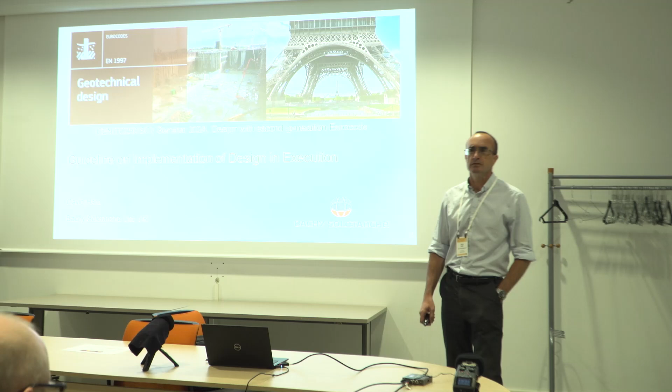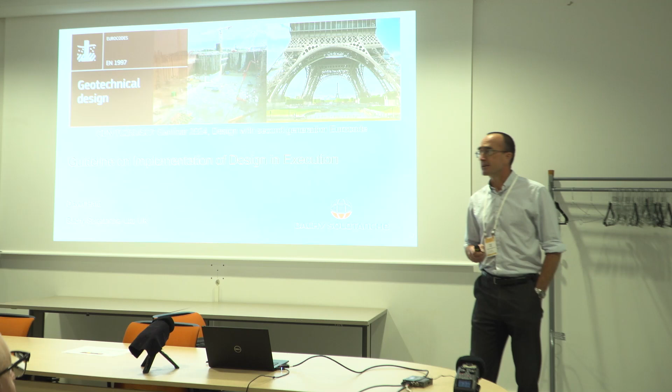Good morning. I'm going to label that as an expectant hush, as it falls quiet. Good news and bad news: the bad news is you've chosen the room with the less comfortable chairs. Good news is you'll definitely be out of here in less than an hour and a half, because I have no intention of taking that long. Okay? So, right.

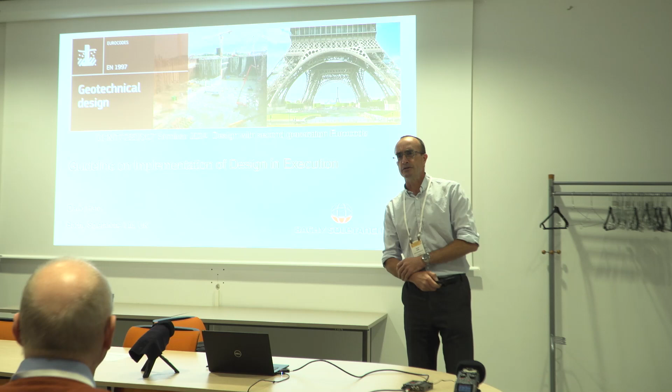Guideline on implementation of design in execution, TGC4. I'm David Hard, I'm Chief Engineer at Bachy-Soletanche in the UK. The observant people will notice that earlier on it was Soletanche Bachy on the screen. I work for Bachy-Soletanche because in the UK we have to be different from the French, so we just swap the name round. Same company.

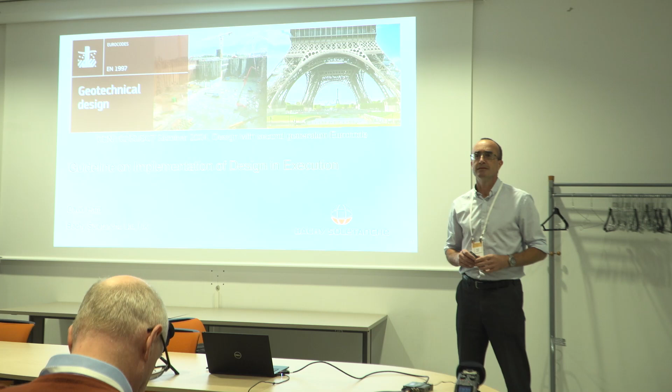I am a designer. I've spent 30 years as a designer, but I work for a contractor. So every day of my career I have been involved with implementing design in execution. So for me, it seems kind of obvious, and I don't understand why people don't do it. However, a lot of people do get it wrong.

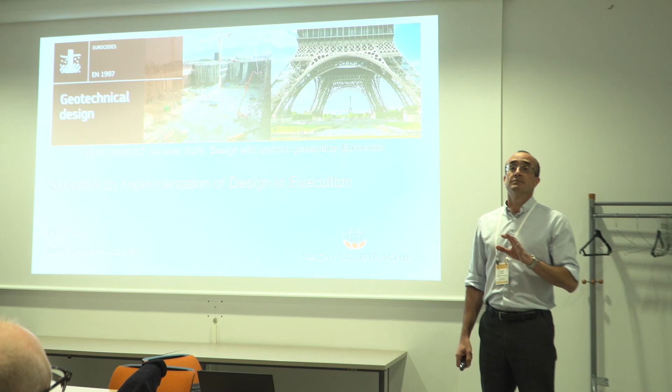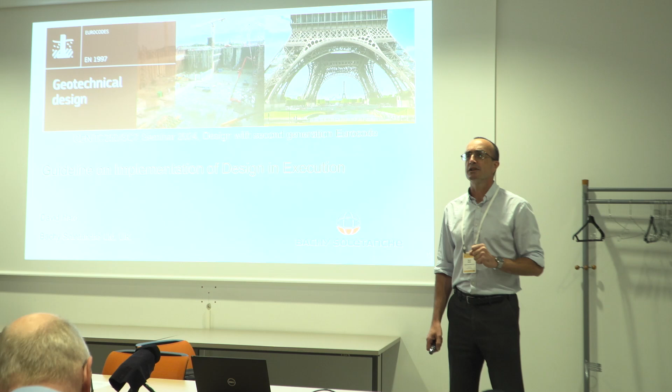But to be clear, this is not my report, okay? The task group had about 22 names from 15 countries. I sent out meeting invitations, I hosted meetings, I nudged and adjusted when people had questions, and I did some editing at the end, but this is very much the work of the task group and not my personal report. Of course, if you think it's really good, it is all my own work, okay?

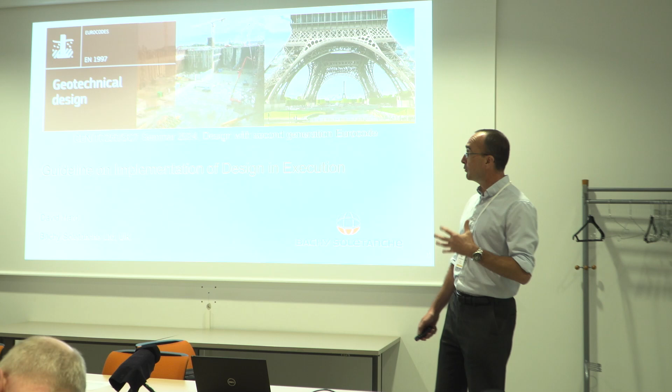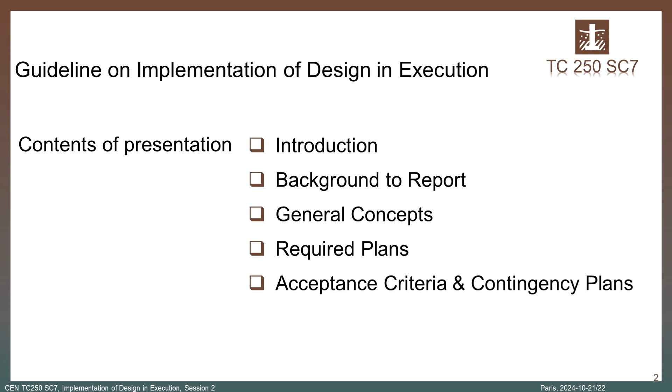So, the background to the report. We were given a scope by SC7. It got tweaked a little bit at the beginning. This all started back in December 2020. So this has taken quite a long time to get to where we are. I had a lot more hair when we started, and not all of it was grey.

So we were asked to look at some general guidance on implementing design. It actually includes, the full title is, in execution and maintenance. But how do you maintain a pile? Okay, so it's generally referred to as implementation of design in execution. We were then also asked to give some guidance on how you should implement the plans, because 1997, second generation, requires you to produce a whole bunch of plans as a designer.

We're then, linking on from that, asked to look into setting out acceptance criteria and what those are, and limit values. And then if you're going to set a limit, that implies that you might go beyond it. So if you go beyond it, what do you do then?

But quite important to this is that point: it needs to cover all types of geotechnical structures we need to look at, and particularly small and medium-sized projects. For me, I don't see this as being a particular issue on the big major projects. If you've got a big mega project, you're building metros, airports, dams, you'll have, I would hope, a mature enough design organisation that they are capable and competent to get it implemented during execution. I don't see those as being the problems. It's the small and medium-sized projects where I think there's more advice required. And then, bottom line, a link to execution standards.

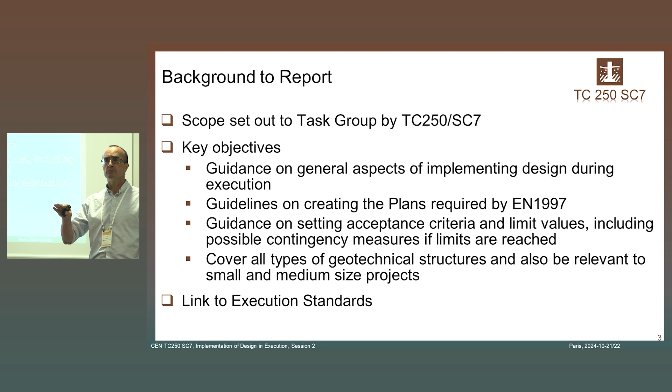Now, okay, I said I'm a contractor. Who here would classify themselves as a designer? Who thinks they're a designer? Okay. Who would say they're a contractor? Okay, it's okay, we still outnumber you, the designers.

Another question: who here in the last week has used Eurocode 7, or Eurocode 2, or 1990? Okay, quite a few of you. Who in the last week has looked at an execution standard? Okay, that's more than I thought. Is anyone going to be brave enough to put their hand up and say that they've never looked at an execution standard? Okay. Yeah, I have my doubts.

Purely because I've worked with colleagues that I know have never opened up an execution standard. I say to them, you do know that's in 1538, and they're like, what's 1538? It's the execution standard for the thing you're building. There is an implicit connection that if you're designing to Eurocode, you are building to the execution standards. And that is an implicit part of your design code you are using.

For full disclosure, I am the UK representative on TC 288, up here with TC 250 which is design. 288 is the technical committee in charge of the execution standards, and I am actually the liaison between 288 and 250, which is probably how I got dragged into this.

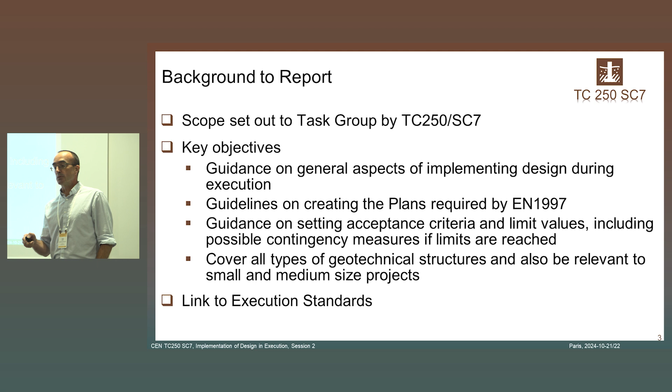However, as with any report, there are some limitations I need to make you aware of when we start off. It's a guideline, not a specification. You can't wave it and say it said it in this document, therefore it is a specification. It's a guideline that we've produced.

It is complementary to the code, so we have to be very clear that we were not creating new content for the code. There were a few discussions around that because some people did want to try and sneak things in, bearing in mind that this was going on whilst the codes were still being written.

It also has to be relevant to all countries, which again is quite a challenge because every country has its own national guidelines on how things get built and designed. So we had to somehow try and pick up that in the document. We've tried to address and reference relevant documents. Some countries don't have them, but generally speaking, the UK, France and Germany do have their own documents, so quite often you'll find those documents being referenced in this guideline.

But equally, it's not exhaustive, okay? Engineering judgment is something that, and I realise I'm turning into an old man, I'm starting to sound like my father, but engineering judgment is something I see less and less of in younger engineers. So again, this is a guideline, we've got plenty of examples in it, but it is on the basis that you will be looking at those in the context of your project. Don't try and make your project fit our guideline, okay? Because that's probably not going to end well for anybody.

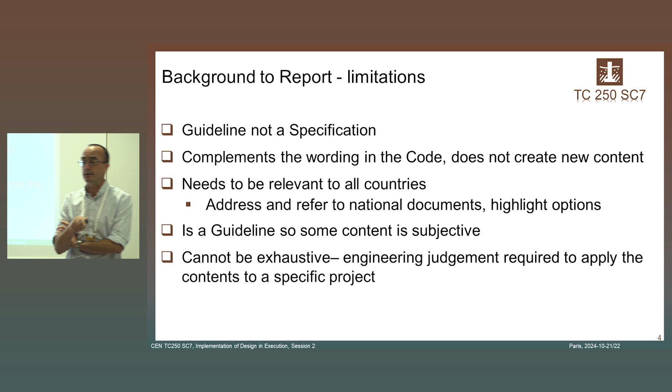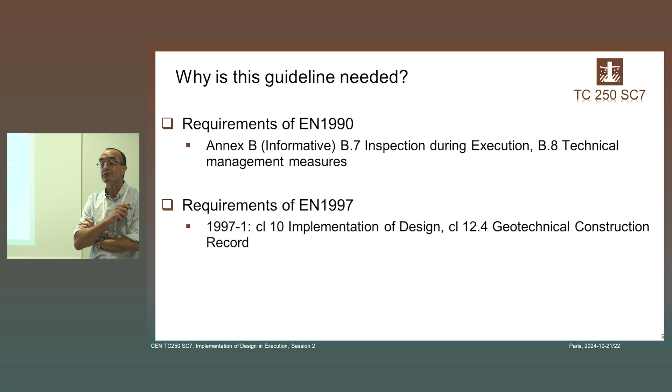So why is this needed? Well, within 1990 and 1997, there are requirements on the designer - this is all aimed at the designer, not the person building it - that you will have quality management in place, and that's in 1990. And in 1997, there's a specific clause around implementation of design. So you are obliged to do this. And so that's why this guideline has been created, because there was a feeling that people weren't quite sure what to do, and in fact the code is quite vague. It just says do it. So why is this important?

Well, the design, yes, is covered by 1997, so you've got a nice design code, that's great. Good luck interpreting it. You need a really big desk by the time you've got all the documents laid out in front of you.

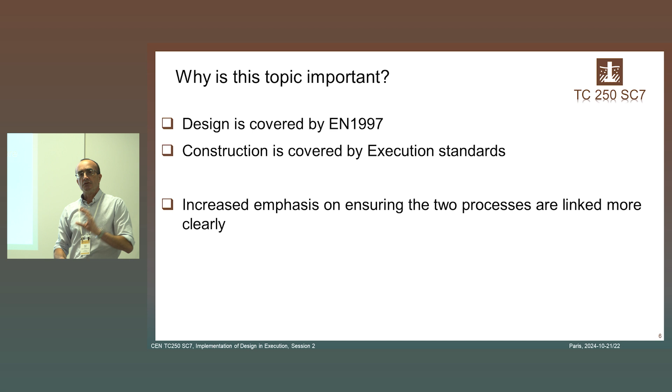The construction is covered by the execution standards, and pretty much all the different geotechnical types of structures have their own execution standard. There is still one being written for artificial ground freezing, but that's a bit niche. But everything else - bored piles, retaining walls, micro piles, displacement piles, anchors - everything has its own execution standard. So the construction's covered by that, but other than vague bits in each document saying, oh yeah, you've got to make sure that your design takes into account the execution, and in the execution standards there's a considerations in design clause that floats through all of them, there's never really been a particularly strong link.

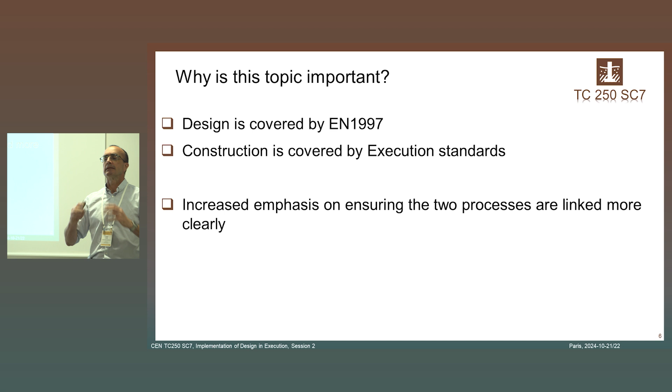So in this second generation of 1997, there was an active thought, let's try and make sure that link is created and reinforced so that it does happen, because I'm biased - I'm a contractor - but if you design something and you don't build it, all you've done is a very interesting theoretical exercise. The only reason for designing the thing is so it's built. So it has to be designed in a way that it can be built. You need to make sure that the entire process is linked through.

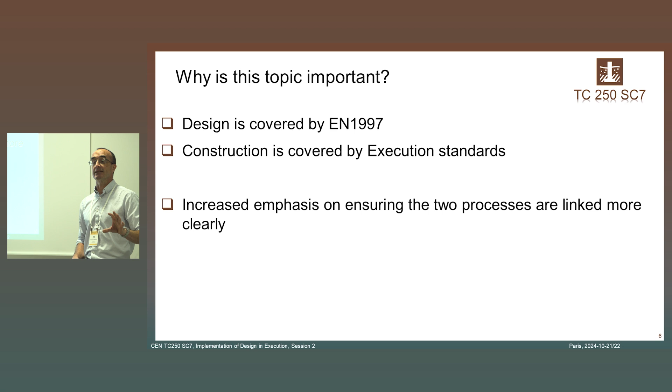The guideline - this is just a run through what's in there. We've got a general section at the front covering all different aspects of the general background you should be thinking about.

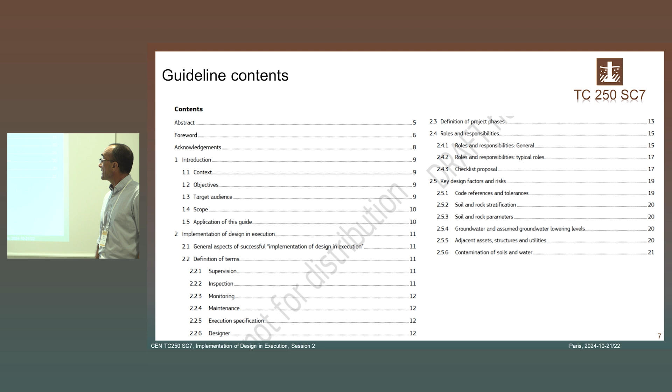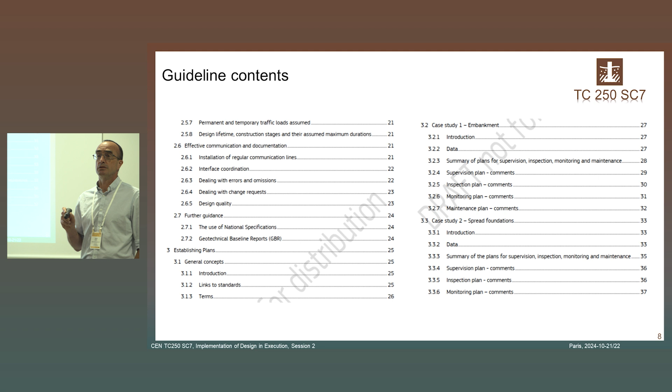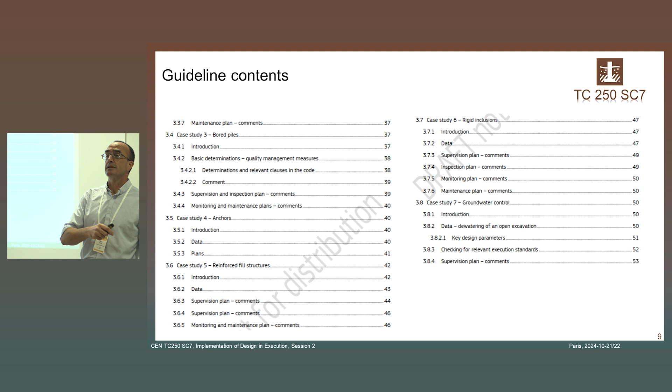And then we have sections on establishing plans, with lots of case studies and examples. I haven't run through any of those here because they're all in the document. The version sent out in advance of this meeting is the one going to publishing, so other than a prettier front page, what you see is what you're going to get. Feel free to go through and look at the examples, since we tried to pick up most of the common types of geotechnical structures you'll encounter when looking at plans. Then there's guidance on what you need to be thinking about as part of those plans, a section on acceptance criteria, and an annex with checklists for the plans.

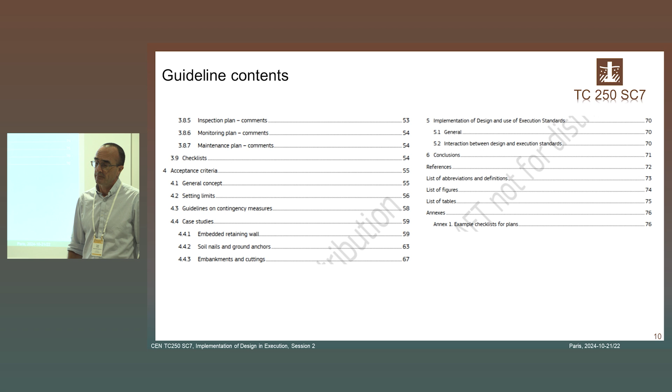So, general principles. If you take nothing else away from this presentation, please take away that top point: appropriate and effective communication. And it's a two-way process. Yes, you as the designer have issued your information to the site, but some documents are classified as being live. The GDR is a live document, so you should expect information to come back to you from the site team, even if it's just them giving you the daily record.

So it's a two-way discussion. Who is doing what, and where do responsibilities lie? It's rare for a project to start off with the same team it ends up with, and I'm not just talking about individuals, I'm talking about organisations. As you move through the project, different companies and organisations get involved, which means you've got interfaces. So pretty much every problem that happens on a site comes down to people not knowing what they're meant to be doing, or having different opinions of what they should be doing.

Who's responsible? You need to start thinking about this at the beginning of your design process. Don't wait until the contractor's been awarded and you've sent off a bunch of drawings to site, then think 'oh yeah, we need to think about this, don't we?' By then it's too late. So you need to be thinking about this as part of your design process. It might seem tedious, a bit like admin - isn't this just document control? But this is the process of how you get your design built correctly, the way you want it.

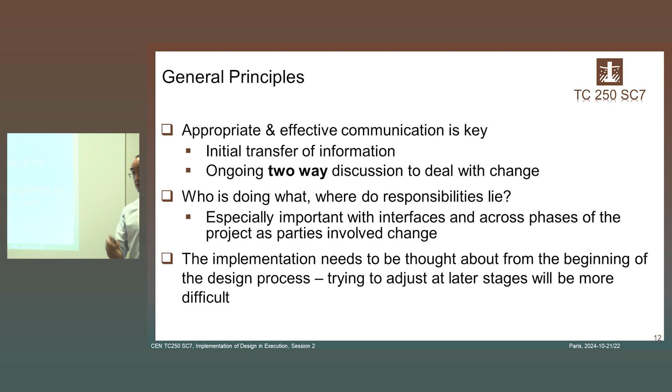So within the report, we identified some key factors useful for successful implementation. The key thing there again is common understanding, and there's a list of items. Because otherwise you can have two organisations who both think they're talking about the same thing, with no malice involved, but they just don't have the same understanding of what they're discussing. So making sure there's that common understanding is key to getting your design successfully implemented out onto site.

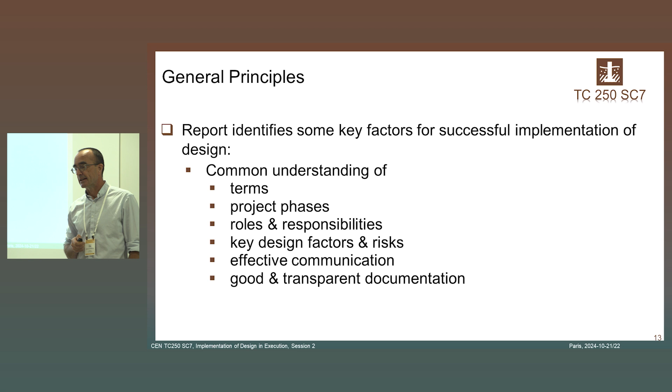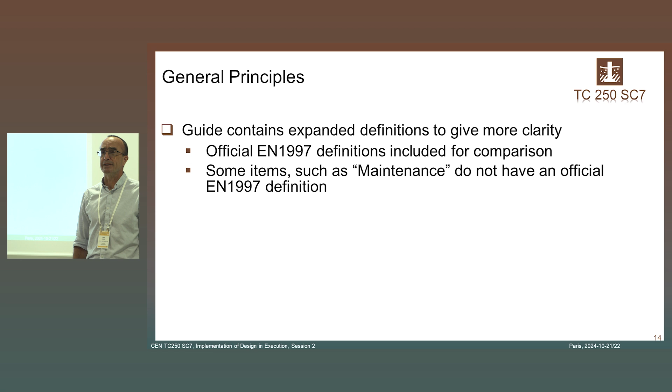So we've expanded some of the definitions. We haven't changed the definitions, and we've made sure the original definition is still in there. Although, interestingly, while you're required to have a maintenance plan, there's no actual definition of maintenance in the code, so you can literally make that whatever you want. We have given a definition for it, but here, for example, is inspection.

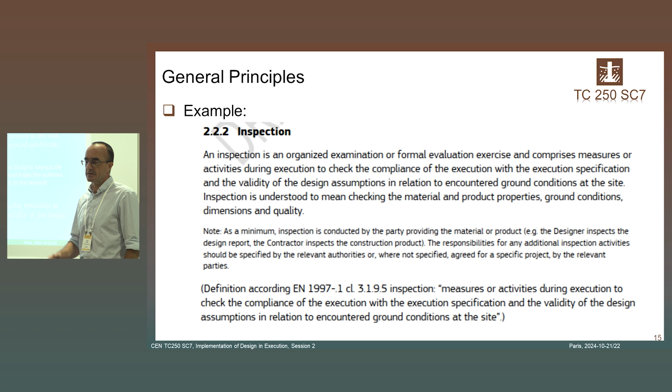But at the bottom - and it's the same for all the different terms - if there's a code definition, it's there. So you can see the code definition, two or three lines. We've put a little bit more into it, with notes, just to try and make it a bit clearer what inspection is. We've done the same for quite a few terms, just to try and improve this common understanding, and some of those took quite a bit of picking through to get an agreed wording.

But then also project phases. We've picked out a nice table - I didn't put it here because it doesn't work quite so well on the screen, but it works well in the document. In the UK we have RIBA phases, there's the ACE, in Germany we have the HOAI phases - standardised phases for a project. So if you're talking about RIBA phase 2 or phase 3, it's a recognised stage of maturity in the project.

And then you can also link the documents - which documents should you have ready at that point in time. If you're at stage 3, where is your GDR? Where's your GIR? Do you have those documents ready, and who's producing them? We found globally probably a dozen different methods of coming up with these phases.

So we put in a table just to show how you can use them. This isn't to say you have to use them, but if someone's talking about RIBA and someone else is talking about HOAI, you've got a method of matching them up. It's a way of saying we're going to be at stage 3, and that's when I hand over to you, or at stage 5, and that's when you give me that document - just a method of breaking up the phases into an easy to understand process for everybody.

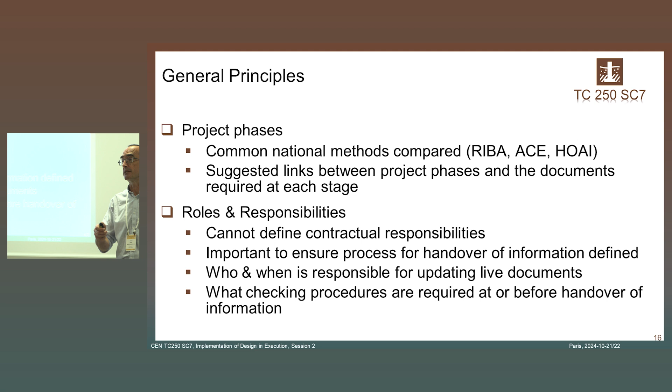Design risks - this is one of the key areas. As a designer you've designed your structure, and you know it needs to found within a certain strata, or it needs to form a cut-off, or extend to a certain toe level. You will have a set of criteria that you need, and you'll also have a vast amount of information, calculations, loadings, and everything you've gone through to get to that solution. The contractor doesn't need all of that.

What they need is the relevant information to be able to build that structure. So if you say I need those piles to found 1 metre into that sand layer, they need to know that. Do they need to know everything that's above that sand layer? Not necessarily. Do they need to know why you've decided to go that depth?

They might, but that comes down to this two-way communication, because if they start finding that sand layer at a higher level or a much deeper level, or they don't find it at all, do they just keep ploughing on until they discover it? What is the process? They need to be able to judge whether they're still operating within your design assumptions, or whether they need to come back to you and say, not quite sure what's going on here, what do you want to do?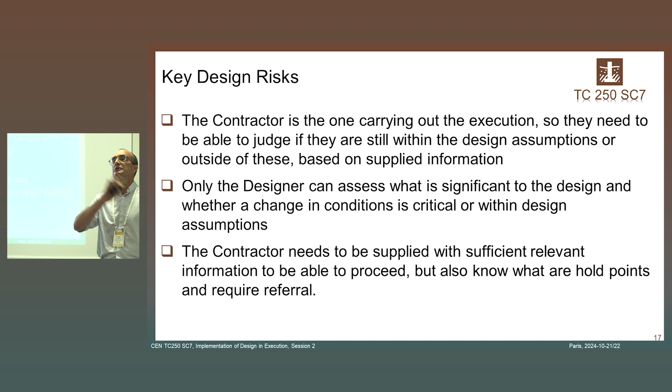So, sufficient relevant information to be able to proceed, but also know what the hold points are. You need to know what's critical in your design in relation to execution - which is not the thousands of gigabytes of data that you've got sat on your computer.

That information also needs to be supplied in a format which the contractor can actually use on site. Geotechnics happens below ground. When we're installing that anchor, dewatering well, sheet pile, whatever it is, we will have very limited information coming back about what ground it's gone into and how that relates to your design assumptions. So if you're saying strata X or certain levels, can that contractor identify that on site?

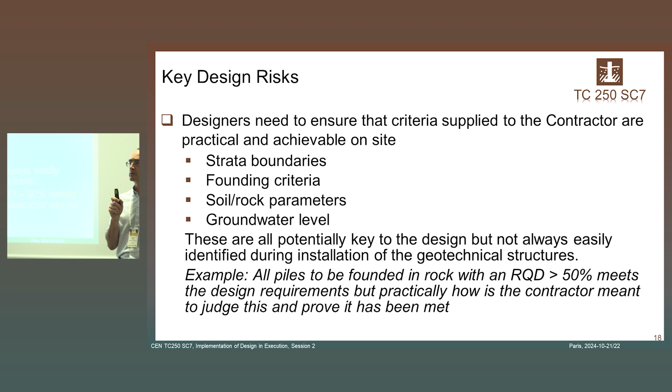That example at the bottom is something I actually had in a project we were tendering, where we were told that the piles had to found, 2 or 3 metres, into a material with an RQD greater than 50%. How the hell is the rig operator going to know that?

Now, you could go, okay, we will put a borehole down every single pile location and take a continuous rock core out the bottom until we have identified what that is. Now, that is a method of solving that problem. It's going to cost the client a lot of money, which is fine if that's all agreed up front.

So that's all possible. But just sticking that note on the drawing, I looked at that and went, how do we price that? Bearing in mind that the boreholes weren't actually deep enough and didn't go far enough, and some of them didn't even identify rock of that grade. So that I would classify as not a very helpful note. But that was critical, obviously, to their design.

And this was at tender stage. We dodged a bullet, we didn't win that job. The feedback from the contractor on site that was doing the job is, yeah, they're losing a lot of money and it's not going particularly well.

But that's an example of something which is key to your design, but has not been totally thought through in terms of how it's implemented. There are methods to implement it, but they're going to be time heavy and expensive.

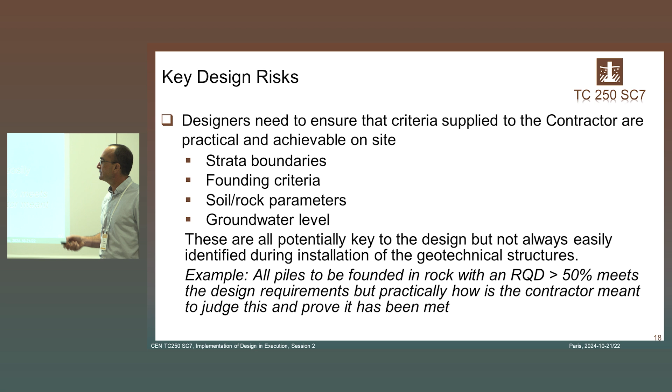So, point laboured. Communication between parties - saying communication is one of the key parts of this process. Any project is going to have its own document control, admin procedures to go on. That's fine. So what we've done in the guideline is say, okay, here's some good practice concepts that you can maybe try and take into your project.

Now, these are points that would be worthwhile having. You may already have them. As I say, the big projects, they're probably already baked into the document control procedure. So things like design handover meetings, making sure you've got contact lists, who's responsible for what. Design coordinator - that will depend on the size of your project.

But if you've got lots of different things going on, lots of different contractors, maybe you've got more than one designer. So do you need one person to just coordinate all of that and make sure that things aren't falling through the gaps?

And then methods to deal with changes, errors and omissions, because we don't live in a perfect world. You get on site, things aren't what you expected. Things go wrong. Put my hand up, we're contractors, we don't always get it right first time, okay? It happens. So what is your process for dealing with that in the design?

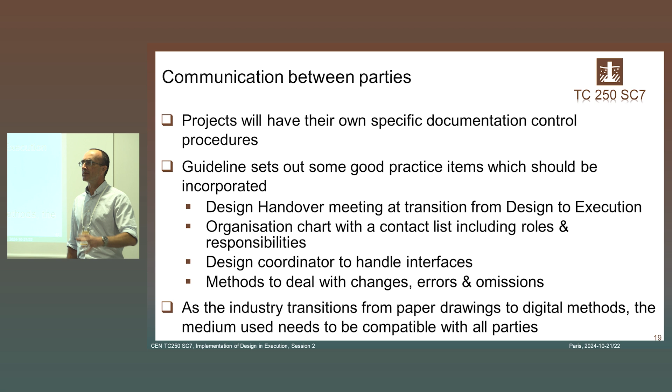Equally, I know some people don't like handing over raw data because in construction, and certainly in the UK, it's a trust issue. That's why you get handed a PDF, because if you get given the PDF, then you can't have meddled with it. Well, yeah, you can meddle with PDFs now. But if someone gives you a CAD file or a Revit model, they're like, yeah, but you might have changed something in there. It's a trust issue. Maybe it's just the UK. We just, contractors don't get trusted.

But think about that. So okay, then the plans, there's a lot of plans, but this is a requirement, you have to do this: create those four plans - supervision, inspection, monitoring and maintenance. A maintenance plan for a geotechnical structure, an interesting one. Depends what it is. If it's a spread footing, it's going to be a fairly simple maintenance plan. If it's an anchored retaining wall, it's going to be a fairly complicated plan. However, all the code says is that you have to do this.

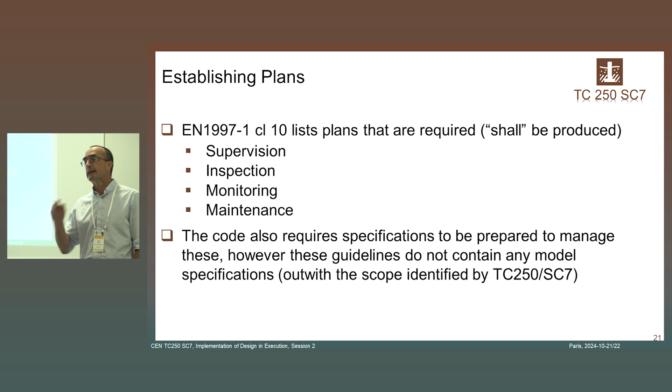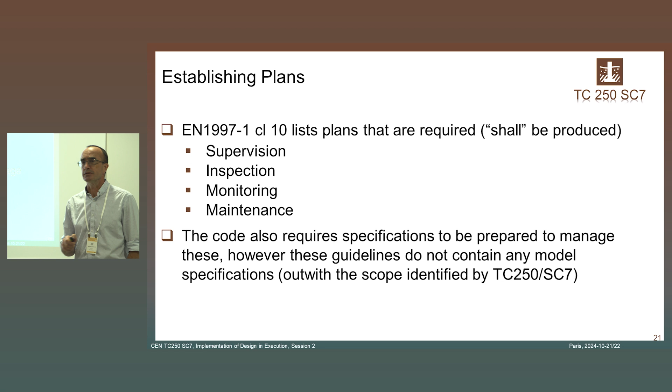And that's the beginning and the end of the help you get given. Hence the guideline. It then also says you have to have specifications to implement those plans, but this guideline is not covering specifications. We've deliberately stayed away from anything that is a specification. All we're saying is, here's some plans, this is the sort of information you should be thinking about, how you could implement it, but we've not got model specifications in this document, because it's just asking for trouble across national boundaries and it's contractual, so we've not gone there.

You have to do them. They have to become part of the GDR. So again, you need to think a little bit about how they're going to be issued. Now, it could be a one-pager. There's nothing to say that one of these plans has to be a massive work of literature with multiple pages. It could be really simple, and supervision and inspection can quite often on a simple project be combined into one thing. So you need to look at your project and say, okay, what do we need to do?

And you may find for some parts of the process the execution standard has already got everything you need in there already, particularly if you're looking at some things like ground anchors - there's some very detailed information in there around the plans. So you'll probably find that a lot of what you need is already in the execution standards. Plus, you don't want to be writing something in your inspection plan that conflicts with the execution standard, because then you've got a hierarchical problem in that the execution standard is the official code document, but you've now written something yourself contractually for your project which conflicts with it. So you're going to have to try and sort that one out. So have a look at the execution standards whilst you're writing these plans - if nothing else, it may save you some work.

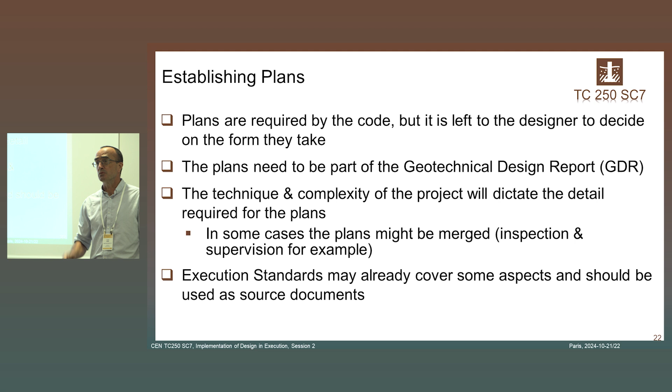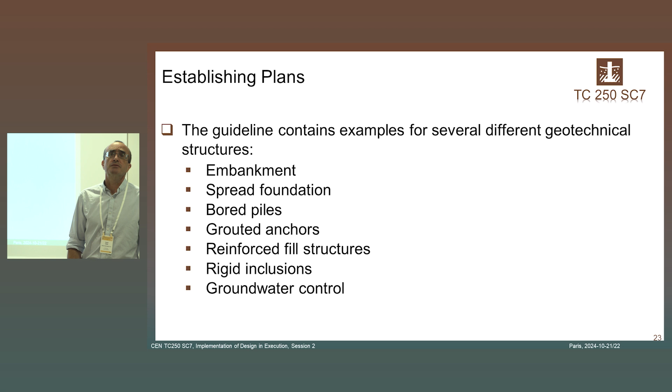So we've looked at, doesn't cover everything, but we did examples for all of those different types of structures. So we felt within that we've probably covered the majority of the issues you're going to come up with. Some are more complicated than others. A spread footing example is obviously not a particularly large, complicated structure.

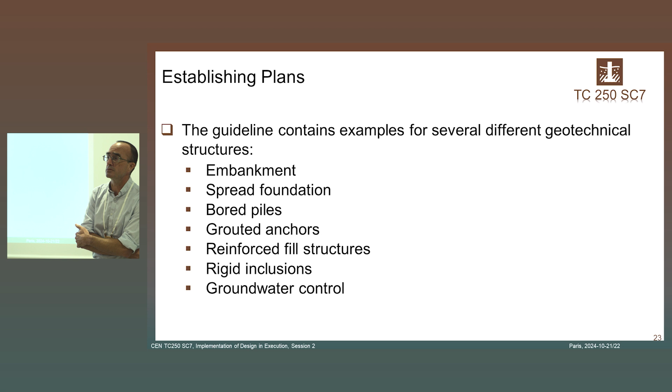Anchors and some of the embankment stuff, reinforced fills, it's a bit more complicated, particularly ground anchors, because if you've got an anchor, you've normally got an associated structure with it - you're not normally going to build an anchor without a retaining wall. So there's a lot more to one of those examples than, say, the others. And then we put groundwater control in there, because that's sort of the forgotten cousin sometimes. Everyone thinks about the physical drill a hole, fill it with concrete type stuff, but groundwater control has got its own clause now. So we made sure we had an example in there to try and cover that as well.

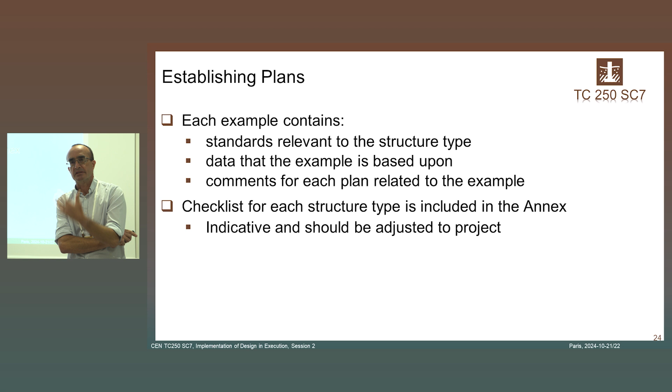Within each of those examples, we've tried to pick up all the standards that would be useful to look at for that structure. So we've picked off the execution standards and any other associated standards you might need to look at to help you come up with that plan. And then there's some data, some geotechnical data about soil parameters, the actual geometry, there's a sketch, and then we put in some comments to cover key aspects you need to think about.

We also created checklists for the plans. Now, this was a big discussion because checklists are a bit double-edged. They're very useful as a starting point for a project, but the risk is people don't bother thinking about their projects and it becomes literally box ticking. In the end, we decided to put them in because they are useful, especially for small and medium-sized projects, where they should be helpful for designers. There's pages of them, because there's quite a few points to pick up on any particular structure, but we decided to put them in the annex as a sort of guidance checklist. As we said, everything needs engineering judgment and needs to be tweaked to fit your project. But in the end, we concluded that checklists would be a useful item to have in there.

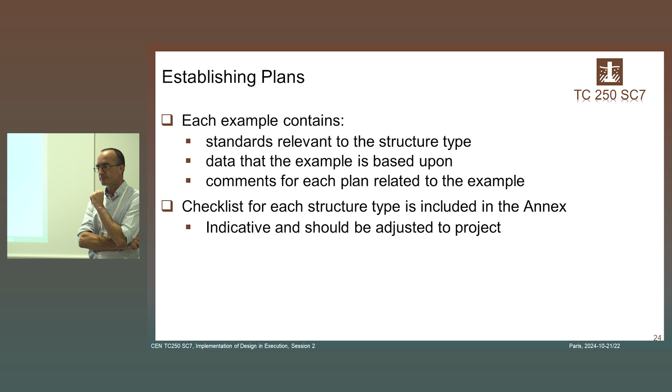The other item we were asked to look at is acceptance criteria. So what are acceptance criteria? Well, this is how you're trying to judge whether your built structure matches your design.

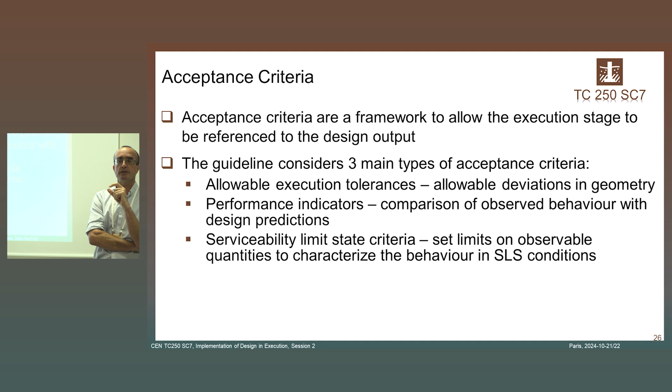We decided there are three essential types of acceptance criteria. There's execution tolerances - how out of verticality it can be, how far out of position in plan, just standard execution tolerances. Performance indicators, which are: is it behaving how we thought it would behave? You've predicted wall movements, pile settlements, or embankment settlements - you've made some predictions. Or the third category is serviceability, which is how it impacts either itself or adjacent structures. So what is the most critical thing? Your wall is designed for, let's say, a wall movement of 25 millimetres, but are there structures around that can't tolerate that, or are there items around your actual structure itself that are critical, so you've got a very tight tolerance in terms of its SLS behaviour?

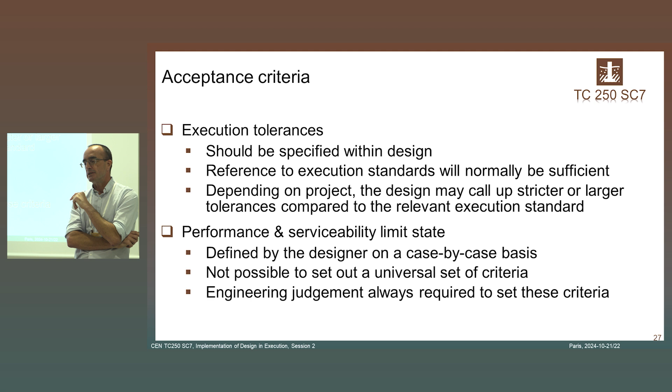So execution tolerances would normally fall within your standard specification. There's stuff in the execution standards. You might decide you want to tighten them up, or you might decide you can live with some slightly looser tolerances. So those should be fairly simple to identify for a project. Performance and serviceability is linked directly to your design itself and the surrounding zone of influence, because there's not a universal set of criteria. You can't say the pile should not settle more than, or the wall should not deflect more than a fixed amount - it's not possible. So you're always going to need engineering judgment to set these criteria and also to adapt as the project goes along.

So the zone of influence becomes quite critical, because you should be looking not just at your structure itself, but at everything else in that zone of influence when setting these acceptance criteria. If you're building in the middle of a green field, happy days, because there's nothing to worry about. If you're building a 6-level basement in the middle of a city, everything you do as that starts going on affects things around it. So you need to be thinking about your acceptance criteria reflecting what all of those other structures can tolerate. And this is where you've got different aspects to serviceability criteria. If something moves too much and it cracks, is that just a case of it doesn't look very nice? People don't like cracks on walls, but it might just be the plaster's cracked. Is that actually a problem?

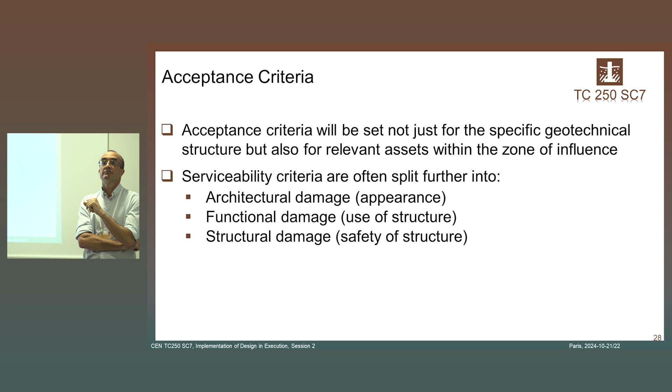You've got functional damage, whereby this has now moved, and this would be thinking about roads, railways. They normally have quite tight tolerances on gradients, so you might have gone outside the allowable criteria for it to be deemed to function. It's not unsafe, you just can't use it. And then there's, actually now this has moved too much and there's a safety issue. So what are those criteria you're thinking about when setting those limits?

There is information on standard sort of deflections and span criteria that structures will accept if you had nothing else from the designer to work on. So you can fall back to that.

Equally, a lot of national, especially railways and highways organisations, have their own documents around their type of structures, where they will say this is the deflection we can live with, this is the maximum change in gradient, and so those will be setting criteria. So if you're working next to one of their structures, you will have to comply with their criteria. You just need to be thinking about what in your country is applicable for you.

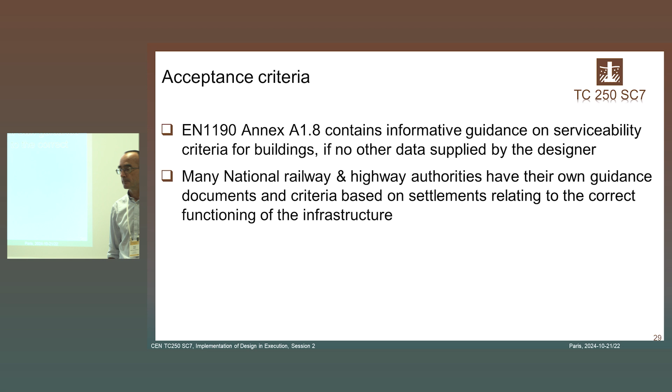So how do you set limits? What sort of things should you be looking at? It's got to be something you can measure, and measure meaningfully. So normally you're looking at displacements and deformations, you might be looking at strains, you might be looking at vibrations.

We did a job in the UK where we were next to the British Museum, which is full of things that the British Empire took from around the world back in the day. Some of those items are literally priceless, they couldn't even get insurance to move them. So we had very tight vibration criteria because of a 3,000-year-old Chinese vase sat on a shelf. They couldn't move it because that was deemed more risky than us piling next to the site. So we had vibration limits set that were undetectable to a human.

We found out in the end that putting in the retaining wall was not the problem. We put in the secant wall and we didn't trigger anything. Excavators tracking across the site set every alarm bell off. It was to do with how the vibrations went through the ground and the footings that the British Museum was sat on. But that's an example of where vibration was driving everything that was done on site.

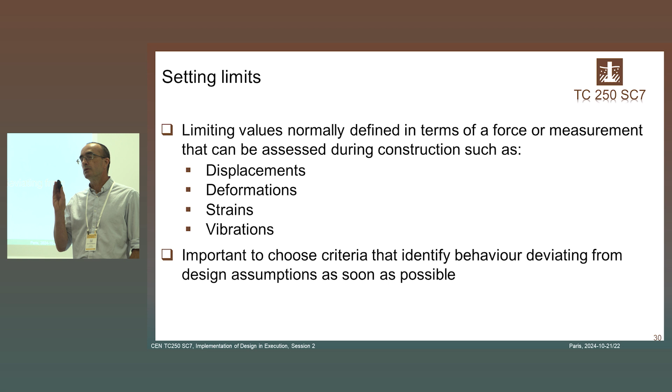So you have to choose criteria which identify behaviour deviating from your design, because you can pick all sorts of things to measure on a site. But what you need to bear in mind is these need to be the criteria that allow you, or the contractor, depending on who's responsible, to pick up that, hang on a minute, we're now moving outside the design assumptions.

There's an old saying that came out of New Zealand many years ago: does it make the boat go faster, for the America's Cup? It's the concept of, if I'm asked to do something, what is the benefit to the project? If it's not benefiting the project other than you're just gathering some interesting data, why are we doing this?

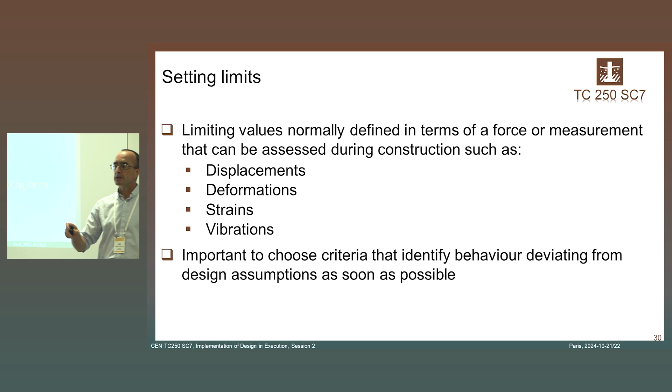So make sure that the criteria being picked to measure against are the right ones as soon as possible. Because if you've picked something that has to have quite a bit of movement before it starts registering, is that the right criteria to be looking at?

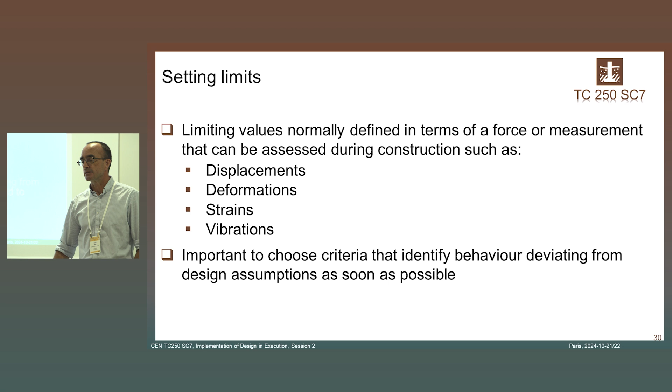So again, there's lots of different ways you can set them. We talk in the guideline about the traffic light system, because it's quite a common concept, most people understand traffic lights. Apologies if anyone's colourblind, because red, green, amber is probably less helpful to you. But it's a very common concept around setting limits.

So you've got green, happy days, the project is doing what we thought it would do. You've got an amber limit, which is, okay, we're now getting towards the limit of what we were expecting it to do. And then you would normally have a red limit, which is the hard barrier we do not want to go through. Because at that point, things have to stop, because we're now into the territory where something is going to be unsafe, something's going to get broken.

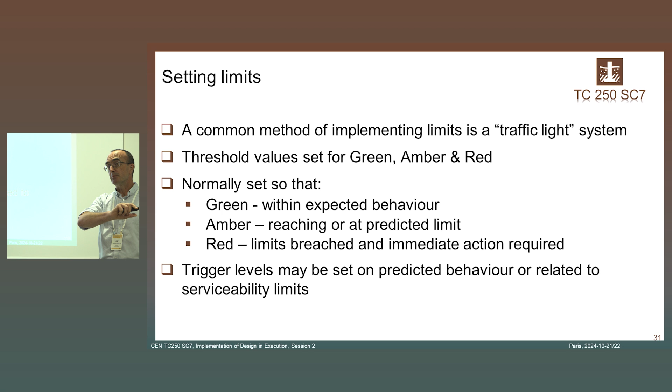Now those limits, they could be based on your predicted behaviour, or they might be set on the serviceability limit. So you might say we've got a limit based on how much the wall deflects, that's your prediction, or you might say we can't accept more than a certain amount because otherwise the adjacent structure will be damaged.

Where you set these limits is, again, this is down to engineering judgment, but some typical ideas might be that, if you set limits too low, you breach them too early in the project, and that's not helpful, because all you've done is gone sailing through the limit, everyone agrees it's okay, and you carry on. So what was the point of setting that limit in the first place?

If you set them too close to the edge, you've removed your room to manoeuvre to get out of the problem if it starts occurring on the red limit. So an amber, you want to be setting at the point where, okay, it's starting to behave a bit beyond what we were expecting. So do we need to start thinking a little bit about what this is doing?

The red limit needs to be, if you set a red limit too low or too small a number, it becomes meaningless. Because I've had projects where they've been set and you go straight through the red limit and everyone goes, yeah, but nothing's happened. Everything's fine. So hang on a minute, why was that set at that limit?

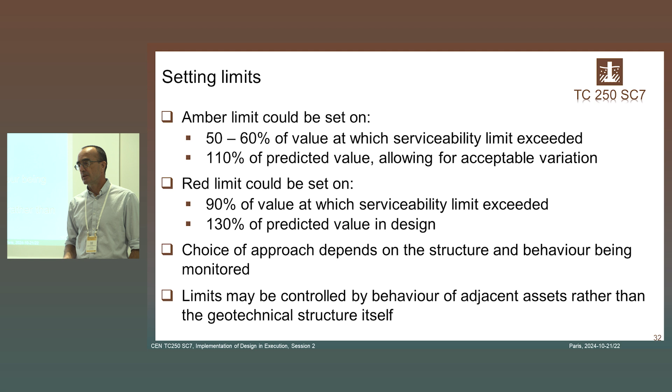It depends on what you're monitoring and why. And those limits are quite often determined by the surrounding assets, not your structure. So you are reliant on third-party information to get these set correctly.

You will also potentially have to adjust these as you go along during your project. You need to have a certain amount of flexibility in there, because if the structure's not behaving as you expected, which could be better, there's nothing to say it has to be worse. Things might be behaving an awful lot better than you thought. And okay, actually, we could change our construction sequence here.

There's opportunity, not risk. And I say in the most extreme case, that's the observational method. You're adapting as you go along. We're not looking at the observational method in this document because there's plenty of guidance on that, and that's a very specific, specialised method. If you want to look at the observational method, you need to be looking at the guidance documents particular to OM.

But when you set the criteria, it's to say you need to think about what is the negative behaviour, what's the impact it's going to have. Because if you say, I need you to stop when you reach that limit, that automatically on a project has a cost and time implication.

So again, you don't want to be setting them too low, but then you also need to make sure you've got time in there for any contingency to be implemented. And also, how close to the edge can you go?

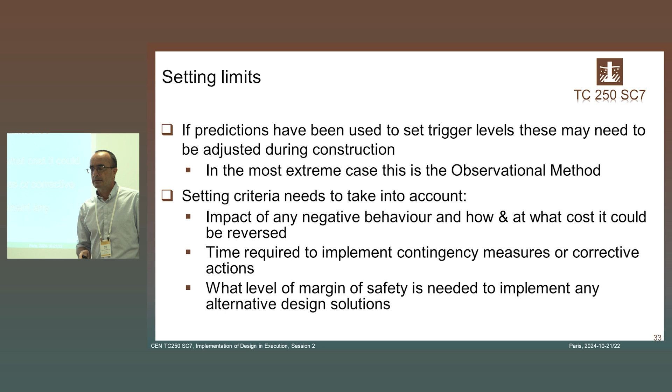So the implications of breaching these triggers will depend on your project, but if you go through a green trigger, that's not normally considered to be an issue, because all that means is you've gone from within what you'd expect your structure to be doing.

Okay, let's just have a little look and see what stage in the construction sequence we are. If we're just starting the project and you're already starting to meet your criteria, you might think, okay, this is a bit odd, what's going on. If you're getting towards the end of your project, when you would expect to be getting towards the limits, you're probably not too concerned.

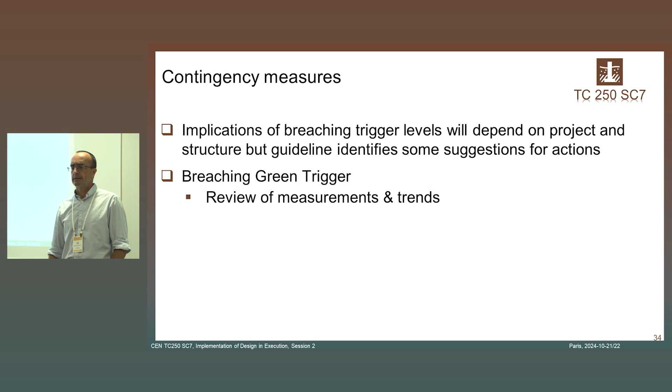If you go through the amber trigger, we've listed out, and again, these are guidance - this is not a specification, you shall do this. These are things that you probably need to be thinking about.

And one of the first things we said was, okay, sanity check your measurements. Are you sure that your monitoring equipment is telling you the truth? What are you using? Are you using a bloke going out with a level, someone lowering inclinometers up and down tubes? Is it electronic? So first thing, just have a look.

Is it a rogue reading? Has someone transposed the values? And then, okay, once you believe the numbers, you know, have a look.

Are there signs of distress? Is the structure that was dictating the behaviour of this limit actually looking like it's got a problem or not? Notify relevant parties, you might need to, you might not need to at this point.

Then this is where you start looking at where am I in my design. If the wall has moved 20 millimetres and I was expecting it to move 25, do I need to look at my design parameters, or is it okay because this is the final excavation stage and it's going to sit there for another 2 months, we can monitor it, it's not a problem, it's far enough into the project that we should be getting towards the limit. If you've only just started, you've probably got an issue.

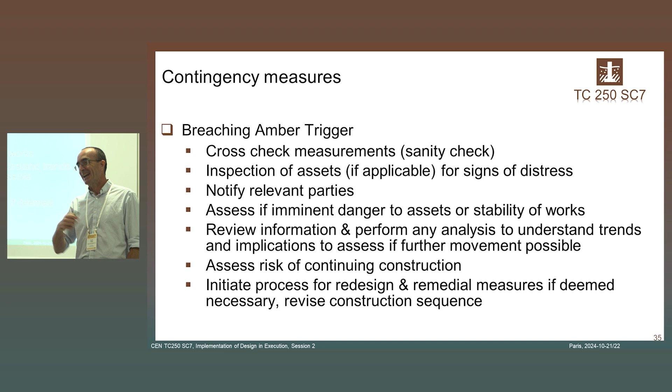So you need to review and look at your design and see where in the bigger picture of the sequence this information fits. And then possibly you need to start thinking about, if this is a problem, what do I need to do in redesign? Not saying you have to do it, but you need to start thinking about that process.

Generally speaking, if you go through a red trigger, the first thing that happens is nothing, because everything stops. That's normally the 'oh expletive' moment. We need to have a plan in place, and this is where additional props start being brought back in, you're backfilling your excavation. This is a problem, if you've gone through a red trigger, unless someone set a red trigger level which is artificially low.

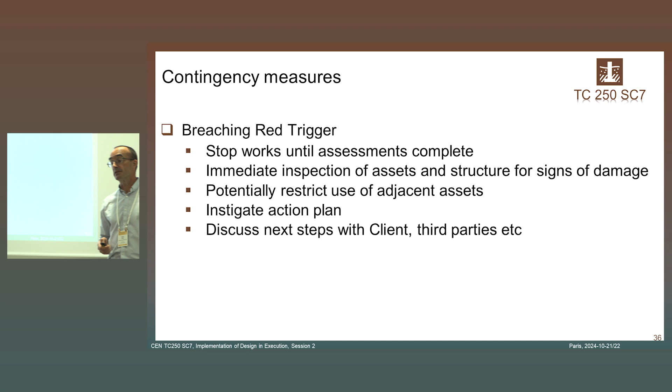So stop work and assess. Everything gets, you would be expecting everything to be inspected. You might be restricting the use of your adjacent assets. And at this point there should be an action plan, you know, in case of emergency break glass. This is the point where you break the glass. And you might be finding you have some discussions with the client, third parties, and these might be awkward conversations.

So in conclusion: communicate. The designer and geotechnical contractor need to be talking to each other. You have obligations under the code to link to execution, so you need to make sure those obligations are being met, but the execution standards may already help you.

Early engagement - I'm very biased on this because I cannot stress strongly enough that early discussions between designers and contractors can remove an awful lot of problems when you actually get round to building the thing on site. Because the geotechnical contractor is the person that understands how to build the thing that you want. So early engagement is critical in geotechnics to make sure that you have the right solution.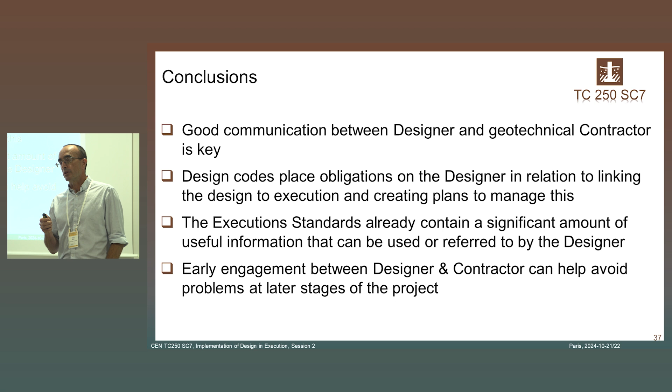The plans are down to you as the designer to come up with, so you've got blank pages. The level of detail is going to depend on your project and what you think you need to hand across. We've given you a suite of examples to play with that hopefully will help you do that.

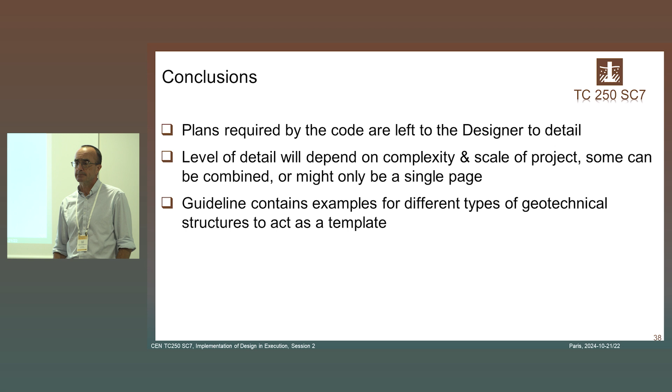And then when it comes to the acceptance criteria, you need to be thinking not just about your structure, but what else is in the zone of influence. I appreciate that trying to get information from third parties on other structures can be difficult. Hakan was talking about uncertainties earlier on in ground models - this is probably your biggest uncertainty. The building next door, when was it built? What foundations is it on? The client's lost the drawings, they don't know. How do you assess that?

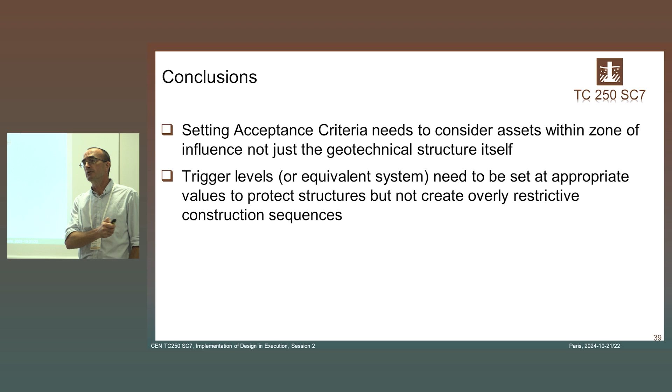And then your trigger levels, or whatever system you come up with to manage these criteria, need to be set at appropriate values. Again, you're the designer, so you will know what's appropriate for the structures, but you need to probably be talking to the contractor so that they can say, okay, that's something that's fairly standard, we can implement that without any additional cost, or have you asked for something which is going to result in a bit of a Rolls-Royce solution being wheeled out? Again, it can be done, but it's cost, and that cost goes up to your client. So if you understand all of this at the beginning of the process, the client doesn't get any nasty shocks later on when you try and get this implemented.